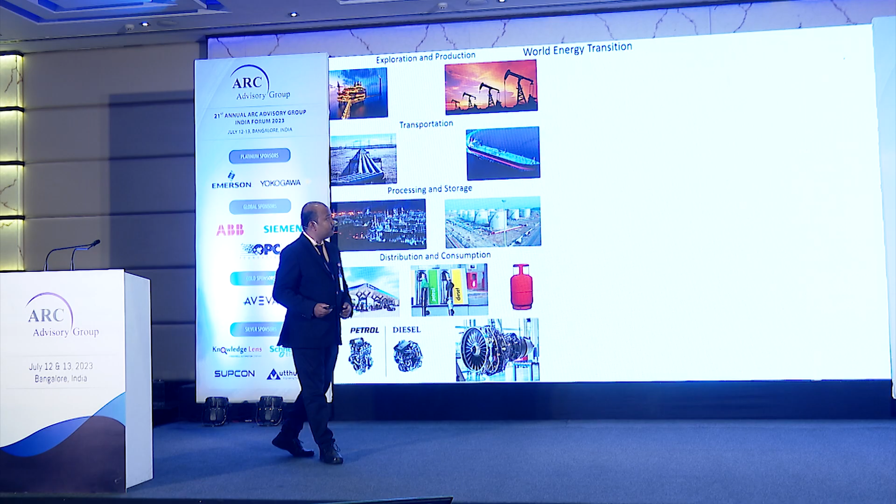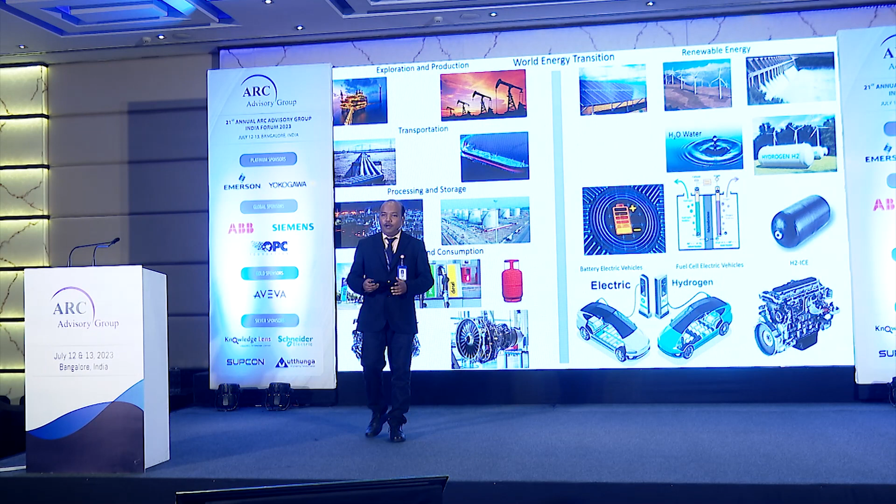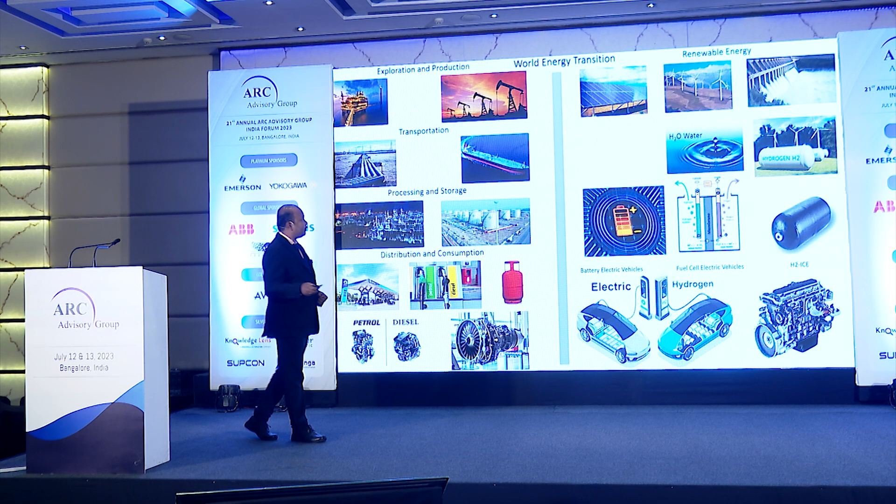So this is the new plan. This is so far called the hydrogen economy or the hydrogen ecosystem. We are going to use renewable energy. India is blessed with a lot of solar and wind energy. We are going to leverage that. We are going to produce electricity out of that. We are going to use that electricity to store in the batteries.

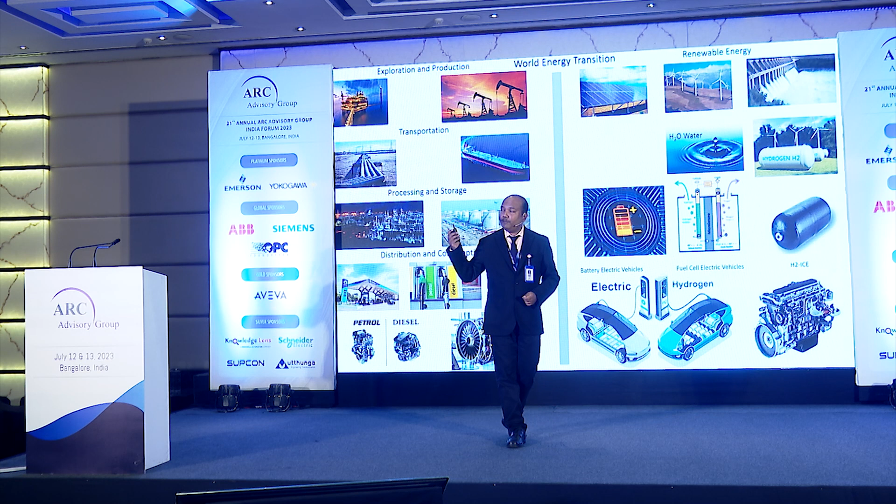Batteries are one part of this, but there is another very important part, that is we need the inventory of this energy. The electricity which is coming into this building right now is being produced on demand, continuously. If a dam stops working there, if a generator stops working there, this will go away. So we need to create the inventory of energy.

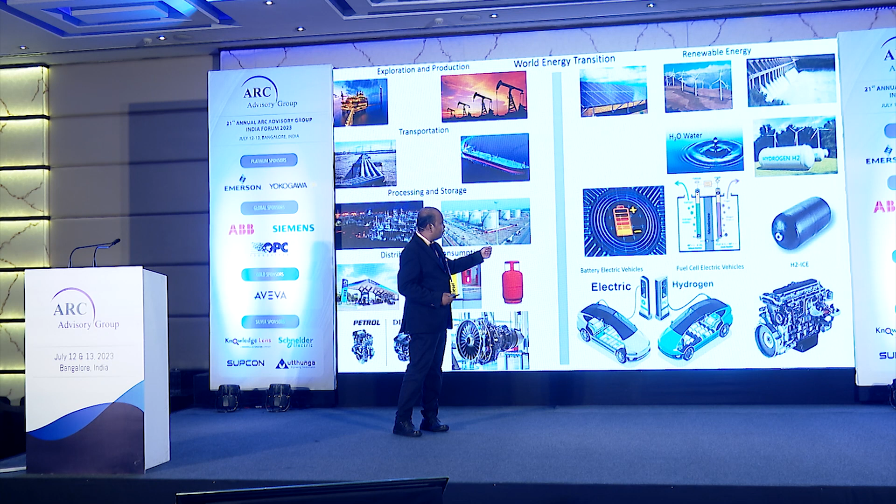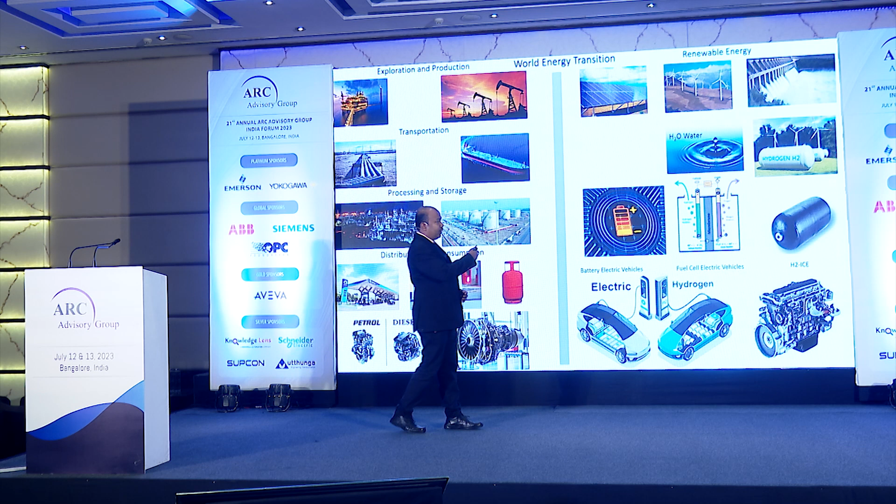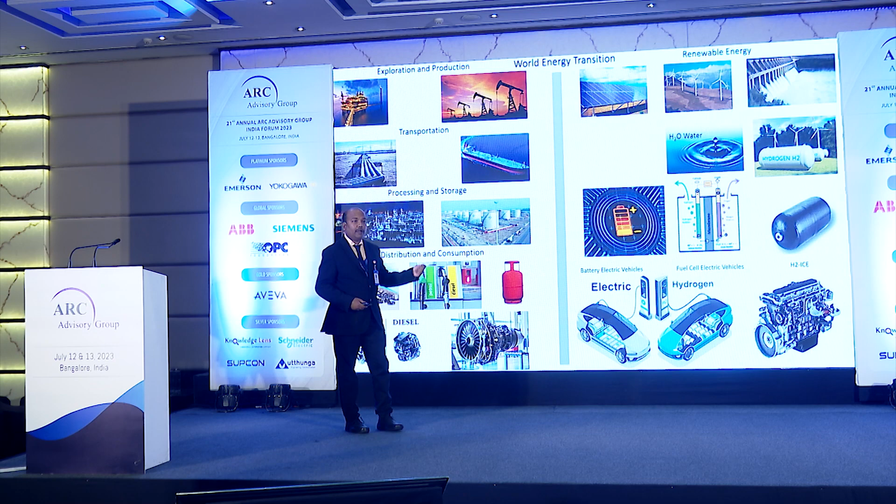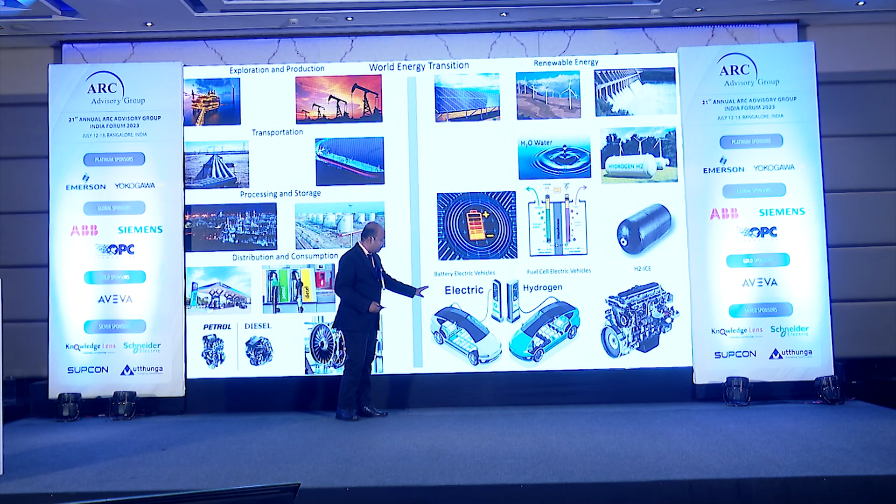To create the inventory of energy, we are going to store it in the battery. The other way is we are going to split the water using an electrolyzer and this renewable energy into hydrogen and oxygen. This process is called electrolysis. This hydrogen will be transported via hydrogen pipeline and will be stored in carbon fiber tanks. And then it will be consumed by fuel cell electric vehicles and hydrogen internal combustion engines for mobility. And battery technology will also be used for mobility in battery electric vehicles.

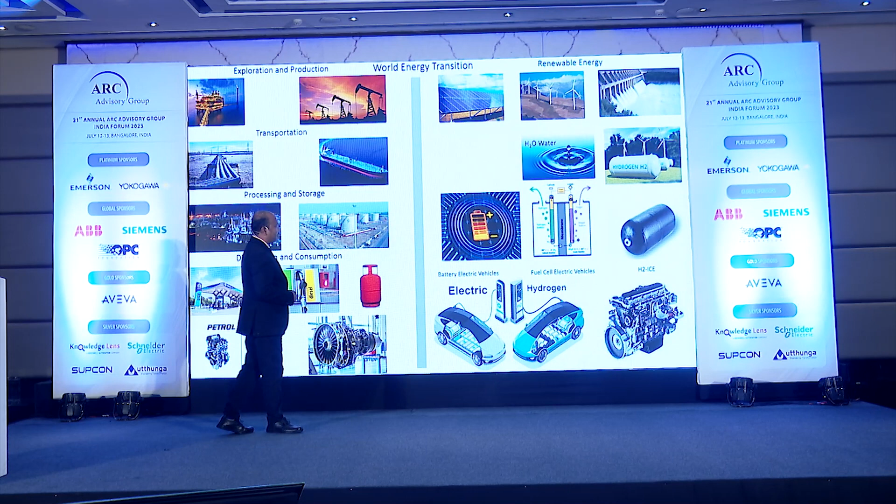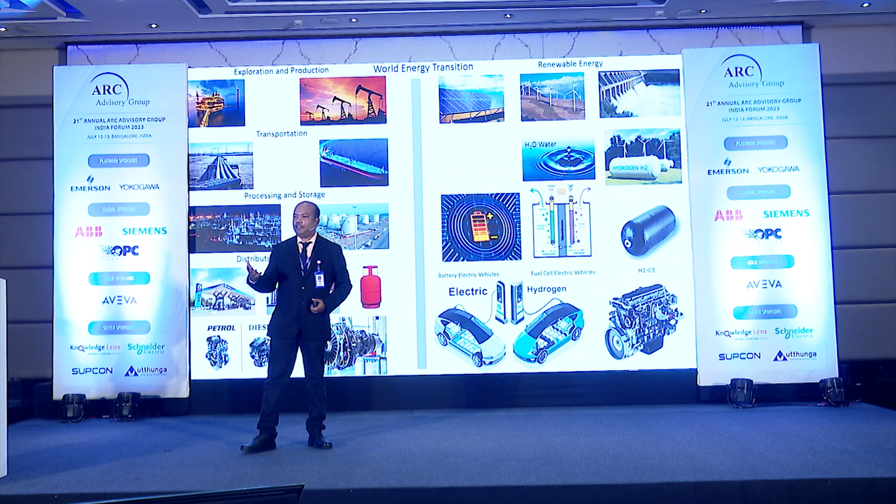There is a catch here. If we can store everything in a battery, then why go for hydrogen? Battery has its own advantages and disadvantages. If you want to make an aeroplane run on battery, the weight of the aeroplane itself becomes very, very high. All the efficiency of the aeroplane will go away. Hydrogen is a very lightweight element which can help in storing this energy. And using technologies like fuel cells, we can make the mobility go. So we will talk about fuel cells today.

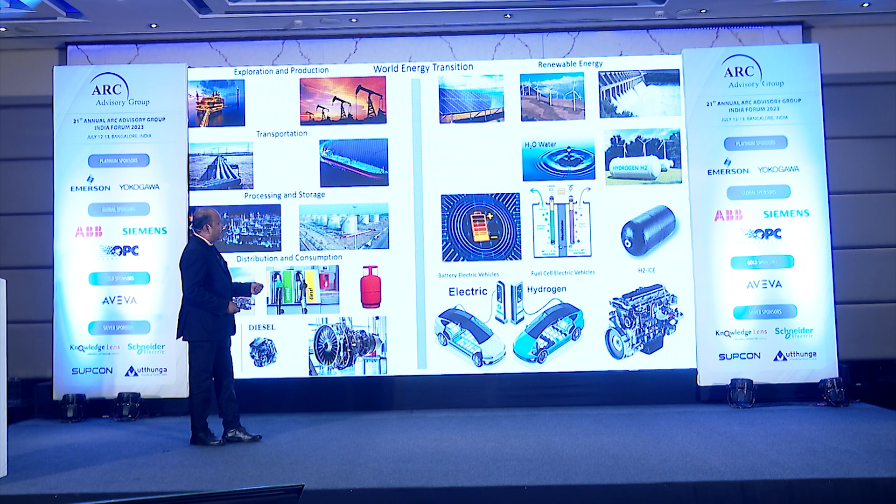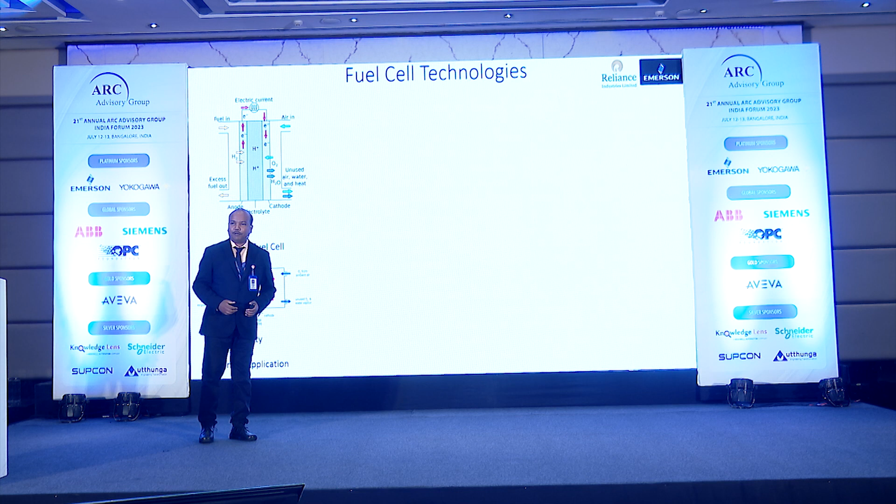Before we talk about fuel cells, let's look into what kind of fuel cell technologies we have. For mobility applications, which we are dealing with right now, we are going to use PEM fuel cell technology. What is a PEM fuel cell? We will not get into the chemistry part of it. I don't want to make it a boring lecture. A PEM fuel cell is a device which takes hydrogen and oxygen and converts that into electricity. We feed hydrogen, we feed air.

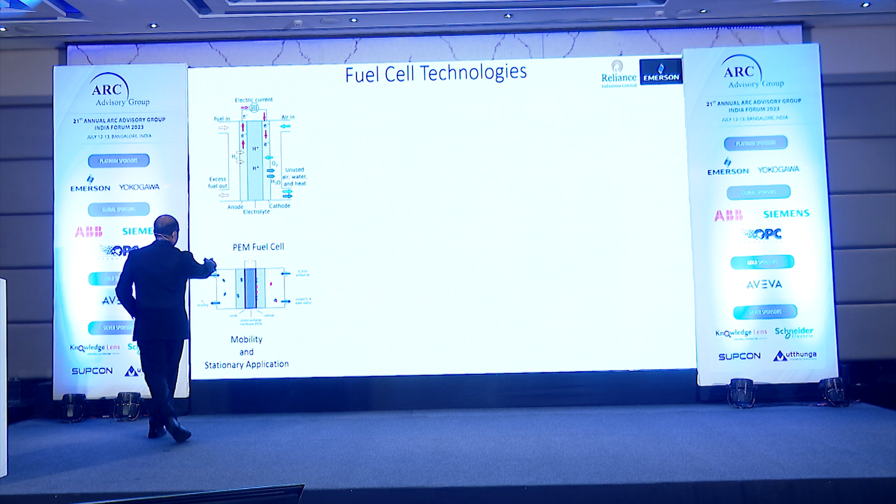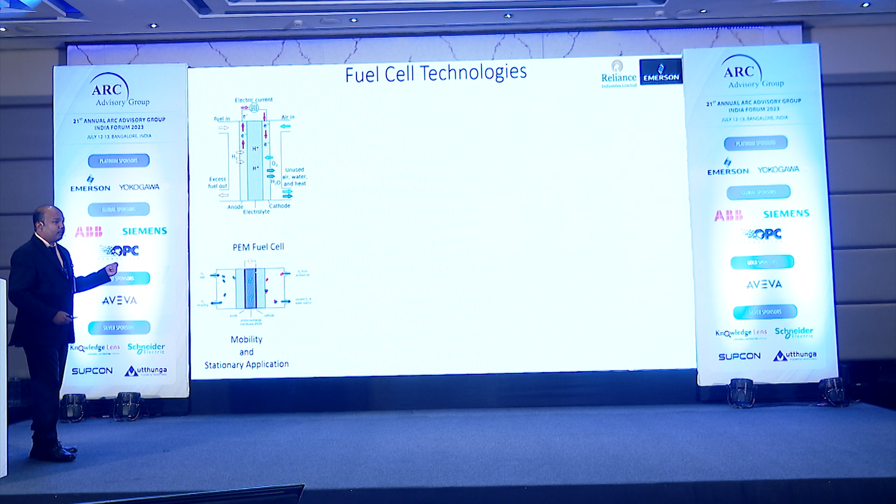The hydrogen gets split into H+ and electrons. Hydrogen reacts with oxygen to make water, and we get electricity, which has been shown here. So the output of this system is electricity and water. There is no greenhouse gas emission here. This technology is the most sought-after technology for mobility as of now. There are other fuel cell technologies as well: phosphoric acid, solid oxide, and molten carbonate.

I'm not going to go into everything, but this one here, the solid oxide fuel cell technology, is also a very interesting technology which is being used in marine sea vessels. So PEM fuel cell technology and solid oxide fuel cell technology are the two main technologies which are going to shape the future of mobility and the future of power generation.

Maybe in the future, 10 years down the line, or maybe 5 years down the line, your building will have a fuel cell system with a hydrogen line connected to it, and it will generate electricity on site. This concept is called distributed energy or distributed electricity generation. We may not depend on a central big power grid. These technologies will make it possible for everyone, everywhere, to generate however much energy they want to use on site and consume it.

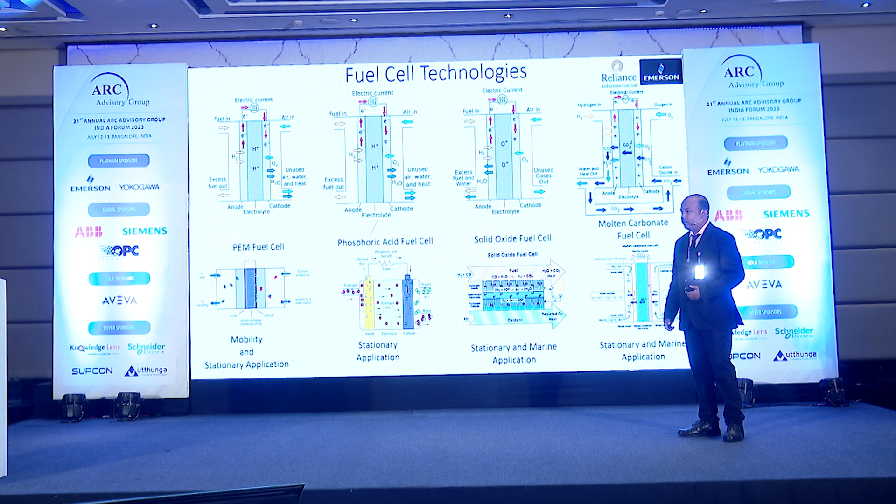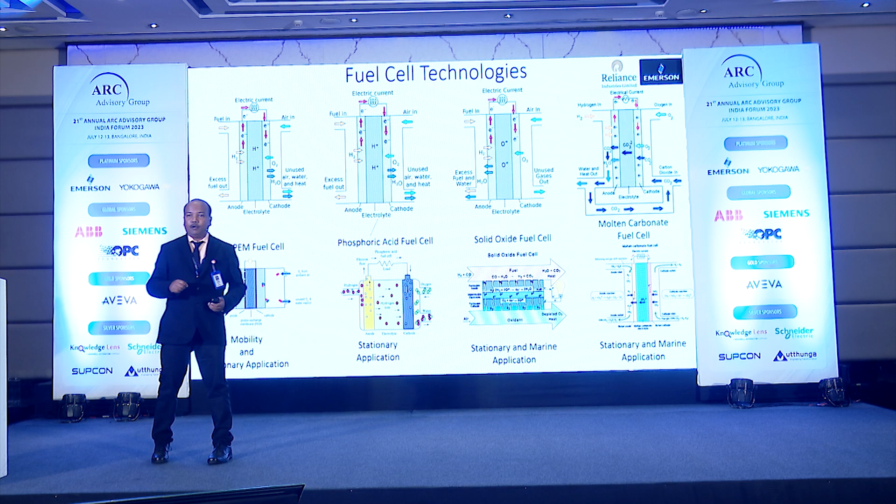The same will go into mobility, cars and trucks, especially trucks and buses, the big vehicles where batteries have a limitation of weight and energy density, and these will convert the hydrogen into electricity on the vehicle itself. And the only emission would be water.

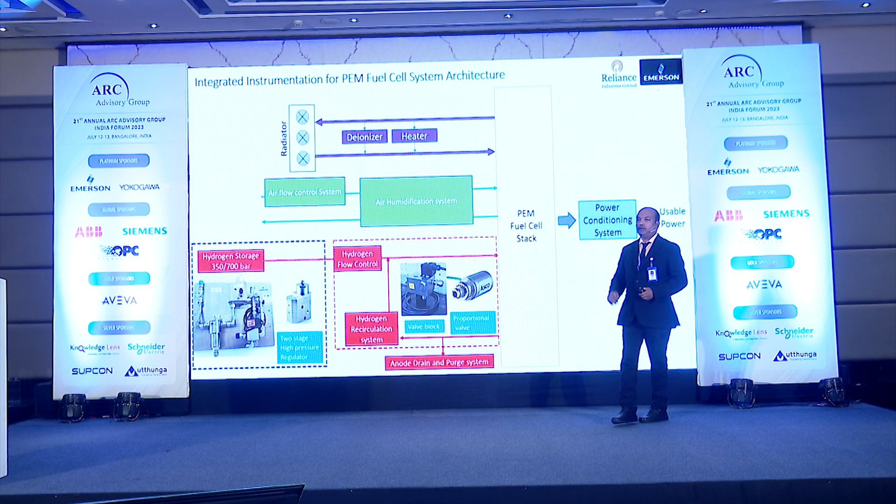So in order to achieve this, we have developed a solution to reduce this 350 or 700 bar pressure to a usable 10 to 25 bar pressure using a dual stage pressure regulator. Emerson helps us in building this. This 10 to 25 bar of pressure is fed to a hydrogen flow control system, which essentially consists of a valve, a pressure transmitter, and a lower pressure control valve. Using this device, the 10 to 25 bar of pressure gets converted into 0 to 3 bar. So this is the device which controls how much energy you inject inside the PEM fuel cell system. It is the equivalent of an injector of an internal combustion engine.

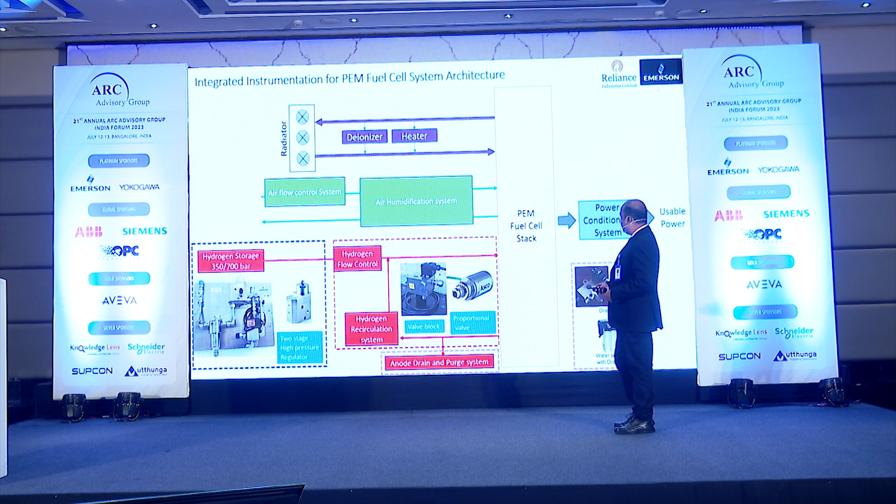Similarly, there is an anode and drain purge system which consists of rapid reaction valves and a water separator. In the air subsystem, we have motorized valves, an air compressor, and most importantly, an air humidification system. And as we progress into the development of fuel cell systems, we'll come to know that the radiator system, or the thermal management system of a fuel cell, is a little bit different than what we use

Oh, 1 second, someone is disturbing me. Okay.

in a normal truck. We cannot just simply circulate any coolant through it. This coolant has the potential to carry charges with it, so we need to deionize this coolant. So Emerson has also supplied a conductivity meter for the thermal management system. So if we want to put all these things together in a vehicle, we need to make sure that this is modular and smaller in size.

The electrical connections of this must be poka-yoke, EMI and EMC compliant, and most importantly, this is a very interesting area where the process industry and the mobility industry are merging their technologies together. Now, if you look into this system, this is the entire fuel cell system which can generate electricity from hydrogen, and this is all you need to build a vehicle which can run on hydrogen, a hydrogen fuel cell electric vehicle.

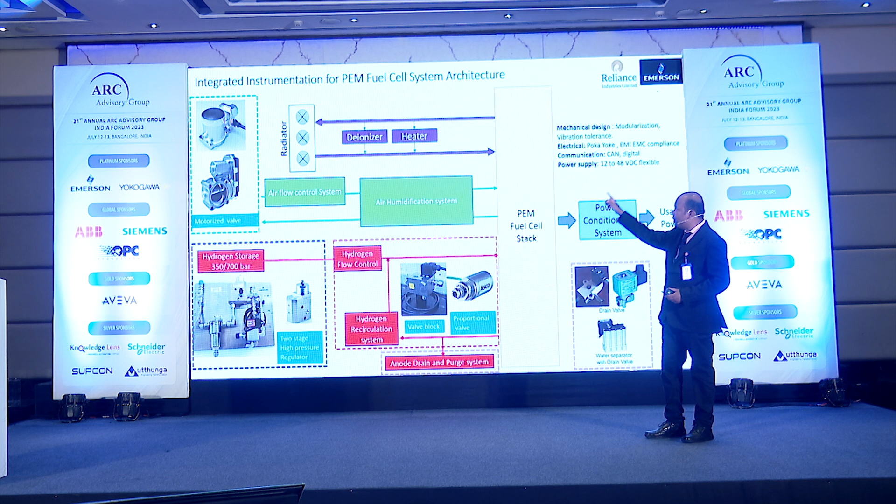But right now, the limitation here in India, or even in the world, I would say, is that one can get a PEM fuel cell stack from a manufacturer, but one has to put a lot of engineering into all these things. This is called the design of the BOP, the design of the balance of plant. But what we are working on with Emerson and many other suppliers is to modularize these things.

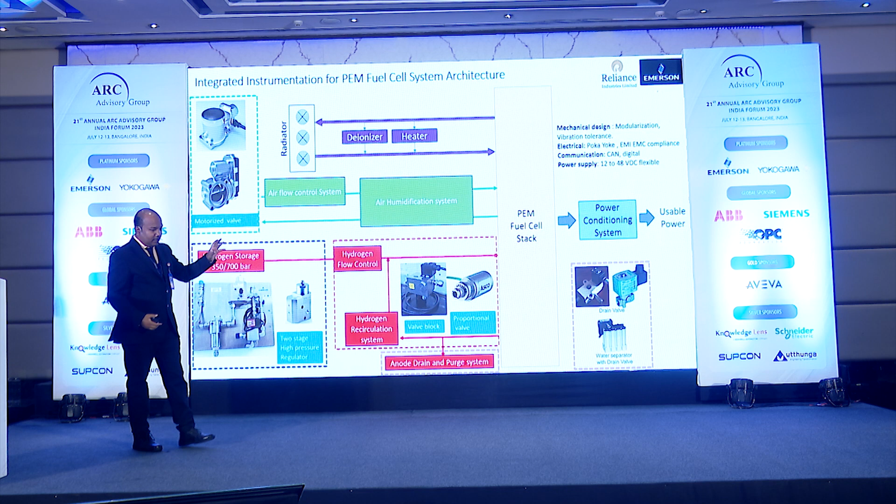What we really want India to do is that everyone should get used to consuming hydrogen or generating electricity out of it. So one can take a fuel cell stack, and we will modularize this entire balance of plant from hydrogen, air, and thermal management system. They can purchase it from any vendor, they can integrate it, and just like a battery electric vehicle, anyone can manufacture this. This is the big vision, because in order for this technology to succeed, it's very important that hydrogen production and consumption go hand in hand.

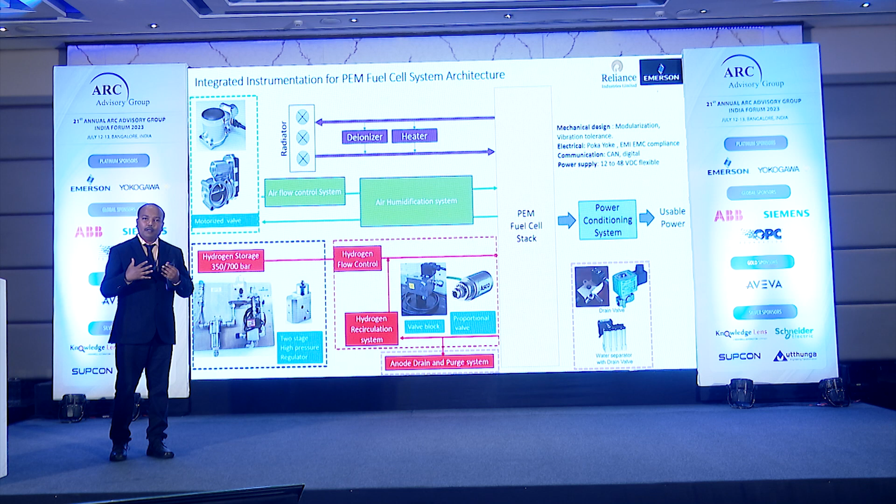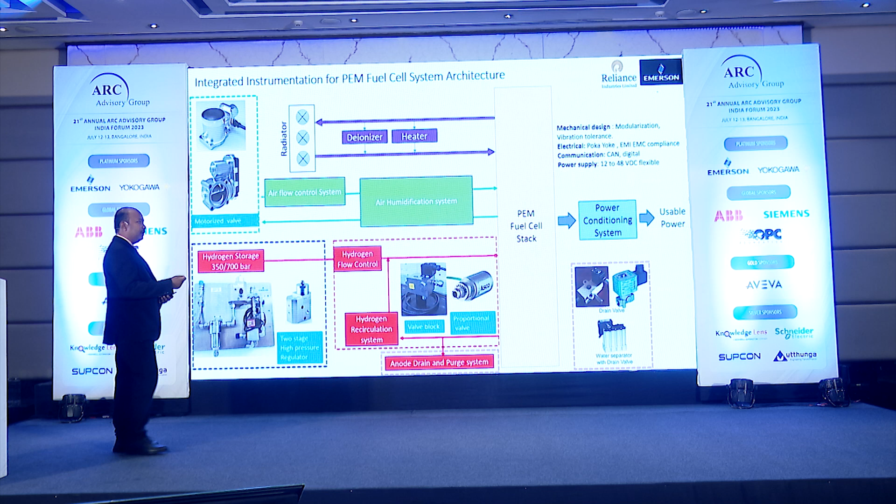If we are only generating hydrogen and there is no consumption of hydrogen, there is a problem. If there is a lot of consumption of hydrogen, like such products are there, but there is no production of hydrogen, there is still a problem. So that's why this world is not transitioning very fast towards hydrogen. But as such products go into the market, hydrogen consumption and production will both get into sync, and we will be able to generate clean electricity and clean mobility technology using such things.

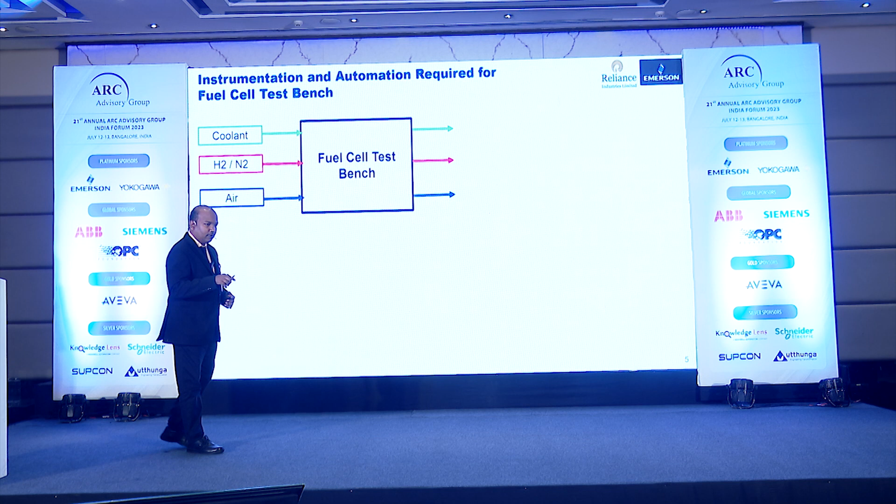All right, but in order to do these things, we also need to test the system. So we have also built a fuel cell test bench where we need to find out at what RPM of a blower how much coolant is flowing, how much air is flowing, and at what pulse width modulation of a valve how much hydrogen is flowing. So we got a Coriolis flow meter connected with a pressure control valve, and using these feedback mechanisms, we made test setups in our Bangalore facility. This is one of the state-of-the-art fuel cell system testing facilities which we have developed at Reliance.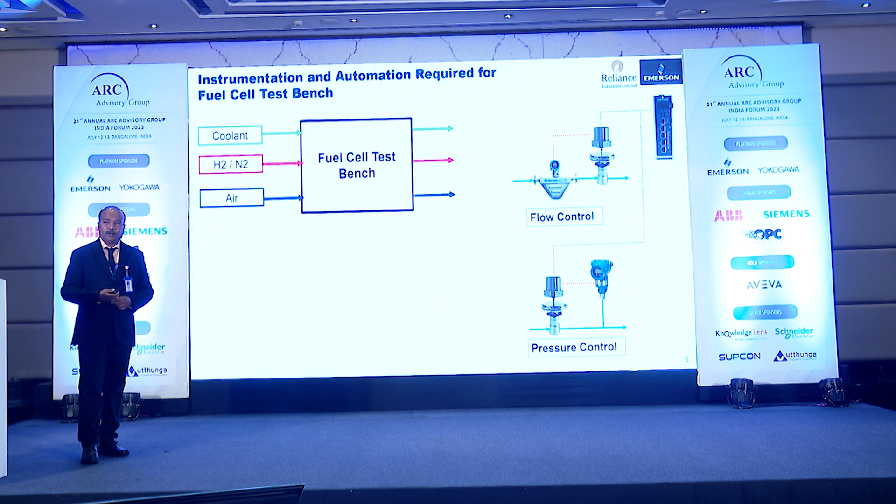We mostly use the Coriolis flow meter and the Vortex flow meter. Now, the Vortex flow meter is very essential for testing the fuel cell system, especially for the air line. I said that air needs to be humidified. Any other flow meter with dual media, or with steam mixed in, may give error. But the Vortex flow meter can handle this. So we are using that.

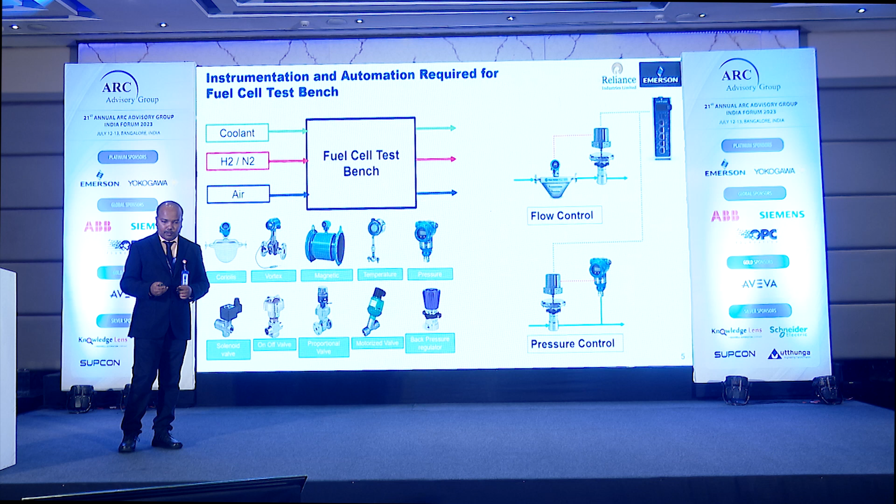There is another interesting application, that is how we are going to refill this vehicle. Using an electrolyzer, we are going to generate hydrogen. This hydrogen will be at a lower pressure, 40 bar approximately. Using a compression cycle, we are going to put it into the storage bank. It will go to a dispenser. The compression cycle will take it to 300 to 700 bar, and then it will be fed to the fuel cell electric vehicle.

There is another product called the hydrogen internal combustion engine, where combustion will happen. But what I'm talking about is the fuel cell electric vehicle, where this hydrogen will directly be converted into electricity. Of course, there is multiple instrumentation. And I should reiterate that this technology is not a very new technology. It has been used in the Apollo missions when people went to the moon.

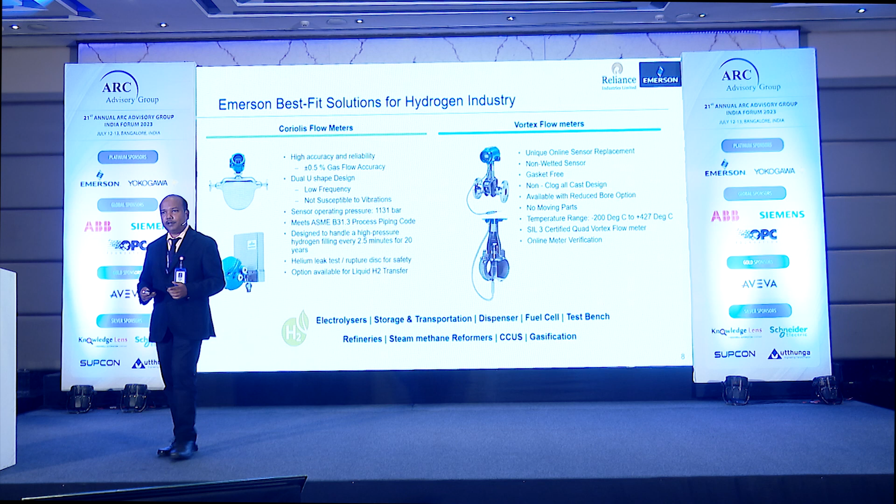Some of the critical instrumentation essential for the testing and manufacturing of such technology, either in electrolyzers or fuel cells, is the Coriolis flow meter and the vortex flow meter. The Coriolis flow meter is very much required because it makes sure the energy is being metered properly. This is one of the highest accuracy meters available in the market as of now, and I'm quite satisfied with the technology Emerson has provided. And vortex, I have explained why it is necessary, because of the humidified media measurement.

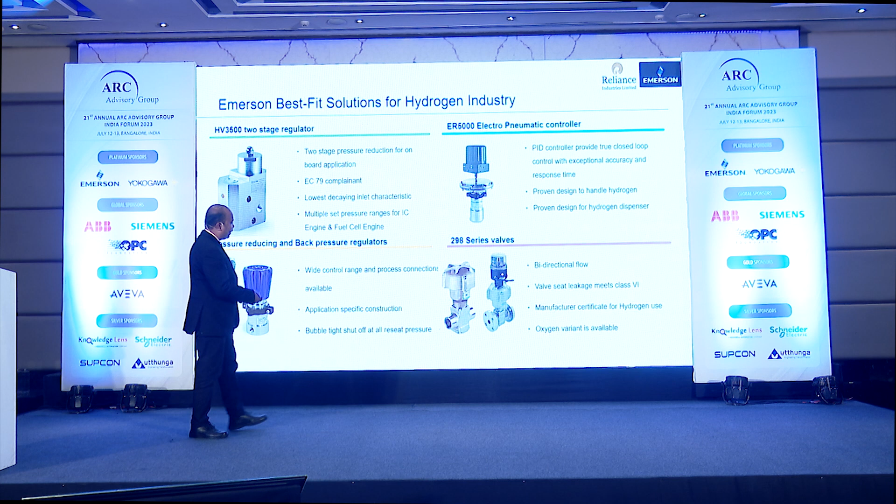The two-stage regulator is another important component. These fuel cells are quite notorious. If you feed hydrogen with pressure variation, their voltage will vary because this is an electrochemical reaction. We need to make sure the hydrogen delivery is very consistent. So this two-stage regulator was a big win for us. We have pneumatic pressure control valves and three-way and two-way valves. I just have the photo of the bidirectional valve, but in the thermal management system, three-way valves are also used.

And I would like to end by saying that in this market of new energy, right now there is no competition. More people coming into this new energy business will make it more viable. Our competition is not each other. Our competition is greenhouse gases. Anyone, any technology, anything we can do to reduce that and make such concepts a reality is most welcome to join us.